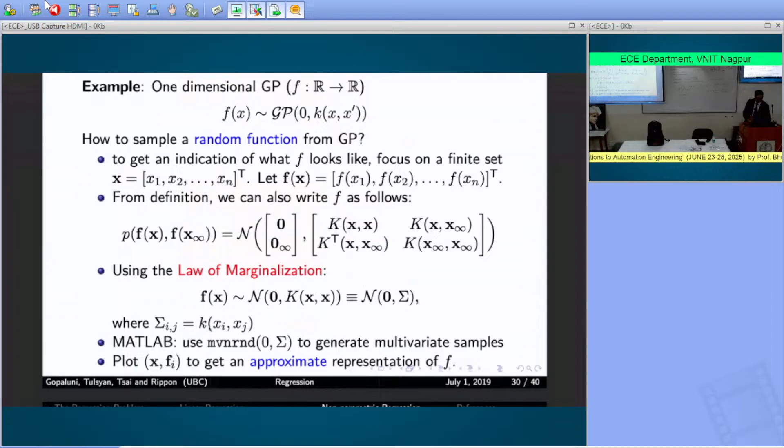Let's see. K is called the kernel function. It's basically the covariance between x and every other data point in your data. Some of these are probably not obvious or not clearly presented there.

Gaussian processes. So when you have a regression problem, you want to map finite training samples to a function that predicts all possible inputs. That's your data, that's the model. Given x star, you want to estimate y star. I already showed you how to learn linear and nonlinear regression problems. You can also do the same with Gaussian process regression, where the goal is to find the mean function and the covariance function from the data.

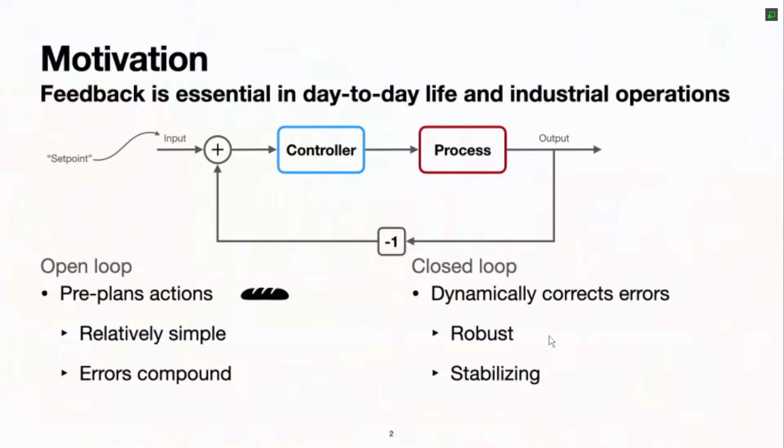So that's where feedback comes into play. If you add feedback and a controller, you can online dynamically correct errors. Therefore, this approach is going to be robust and stabilizing. Okay, so this is a little bit of background on control.

The problem is feedback loops often underperform. If you just have one control loop, it's manageable. You can build a model, synthesize a controller, validate it, and then install it on a real industrial process. But what if you have hundreds of control loops? How do you scale your algorithm? How do you go from process data to controller?

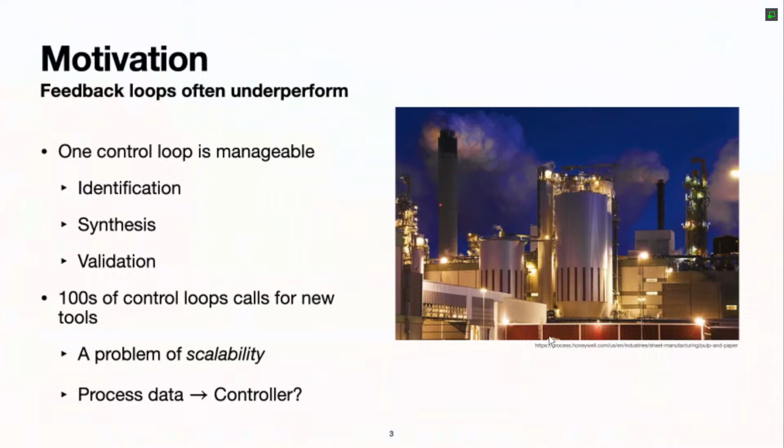And that's not clear. Okay, so we have used reinforcement learning in the context of replacing these traditional industrial controllers. So what I'm going to do is explain to you how we've used reinforcement learning in this context, and then also tell you about how reinforcement learning works, how the algorithms are built, etc.

So I think nearly 7 years ago, I went to Honeywell and I told them we can replace their controllers with reinforcement learning agents. What you see on the left-hand side is what typically happens in industries right now. So you have some environment, some process at the top, and then there is a controller. It's a PID or a model predictive controller or some other controller. And then you have operators and engineers who are constantly monitoring these controllers so that their performance is maintained on a continuous basis.

So I went to Honeywell and I told them, okay, look, we have these nice, cool algorithms, deep neural networks and reinforcement learning. We're going to replace all your controllers with reinforcement learning and deep neural networks. And they said, we've already invested millions of dollars in our existing infrastructure. There's software, so we don't want to change our existing infrastructure. Then we came up with this alternate idea of just replacing the human in the loop with a reinforcement learning agent, which oversees the performance of existing controllers.

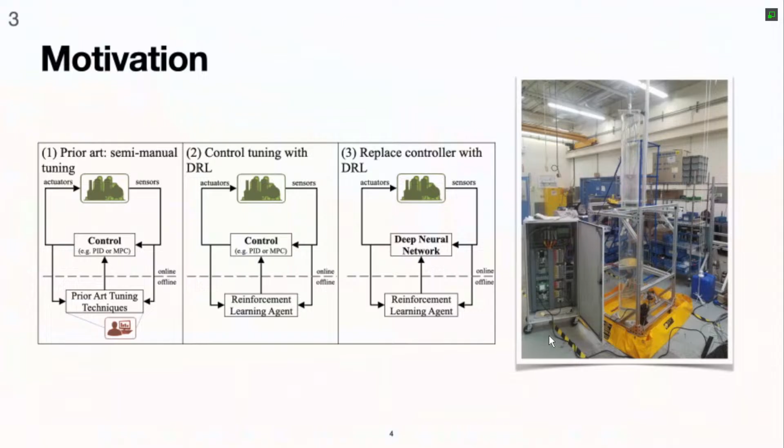What you see on the right-hand side is a pilot scale facility that Honeywell built for us to test some of these algorithms. Okay, so the question we asked was, can reinforcement learning help maintain these control loops? The answer, it turns out, is not very straightforward. With reinforcement learning, you can leverage observed data to improve the operations. You don't need any prior knowledge. It'll still work. You can minimize prior domain knowledge. And you can also build this automated agent that will maintain your controllers without any or much human intervention.

But the challenges are there is additional algorithmic complexity. Industries already have auto-tuners. And stability during and after training is very important. In addition to that, sample efficiency of these algorithms is very important. So our goal was to balance the automation and scalability of reinforcement learning using control theoretic tools to create efficient and safe improvements. Okay. So that's the context in which I'm going to explain reinforcement learning. We're using reinforcement learning as a tool that could potentially eventually replace traditional control systems.

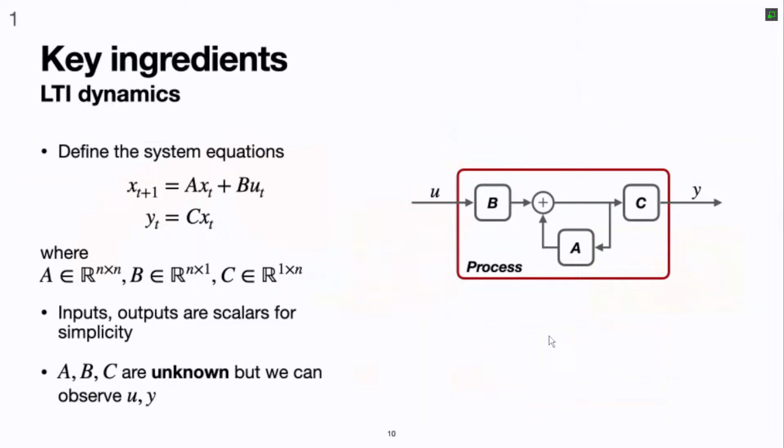You've probably heard of impulse response, right? So if you have a state space model, then the impulse response from X is given by X0. You start at X0, X0 equals 0, Y0 equals 0, and then you have X1, X2. You can use those recursive equations to find the value of X, the impulse response, at different time instants. Right.

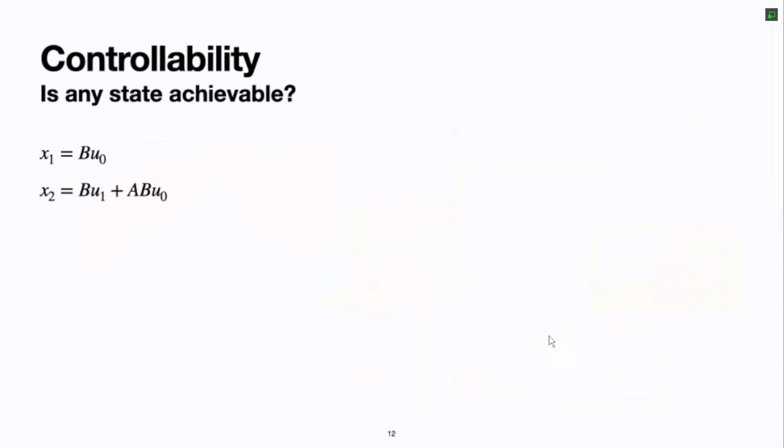The idea behind controllability is if I give you two states, X1 and X2, can you always find an input, a sequence of inputs U, that take you from X1 to X2? Okay? If you can, then your system is controllable. It turns out that this matrix here, C, that is made of the system matrices A and B, if that matrix has full rank N, then your system is controllable.

If that matrix does not have full rank, then you cannot take your system from one arbitrary state to another arbitrary state with a unique sequence of inputs. That's not possible. So controllability is a very important concept. Unless you have controllability with your system, you cannot get the behavior you're hoping for.

And a dual concept to controllability is observability. If I give you the inputs U and the outputs Y, can you find the entire state sequence, X? X's are states, they're hidden, they're not measured. So the question is, if I give you Y and U, can you recover a unique X, the underlying states? If you can, then you have a system that is observable.

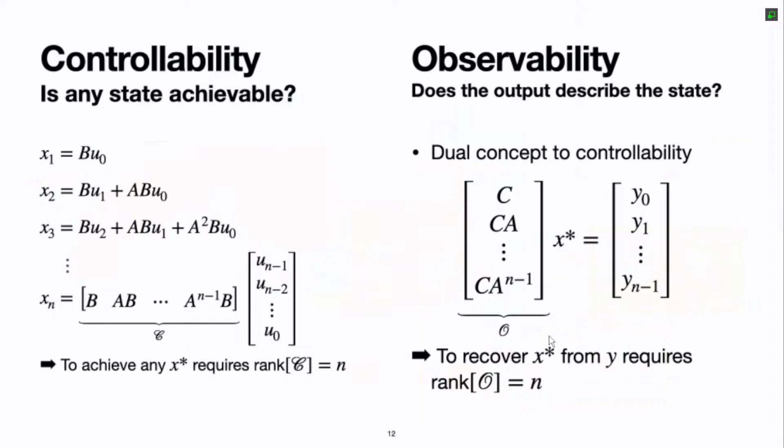And this matrix here, again formed using the model matrices C and A, is called the observability matrix. And one way to check if your system is observable or not is to look at the rank of this matrix. And if the rank of this matrix is full, if it's N, then you have an observable system. Okay, so these are two important concepts in control theory: controllability and observability.

So I'm going to get to reinforcement learning. But in order to do reinforcement learning, I want to build a model from data, okay? And I don't want to use parametric models. I just want a data-based model that's not parametric. And to do that, I'm going to use something called Willems' fundamental lemma.

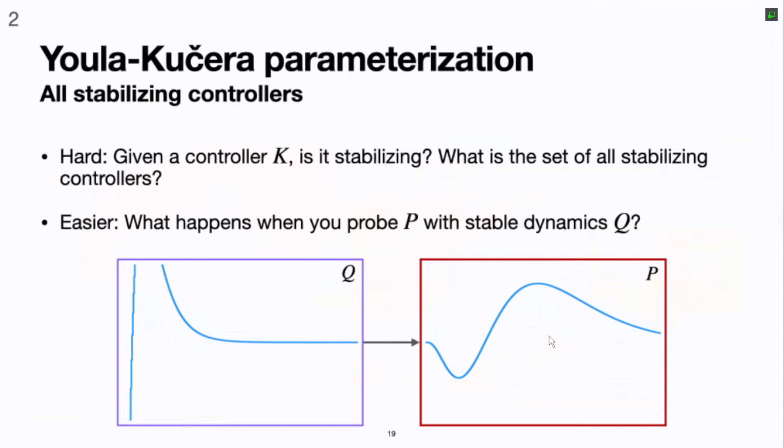The P here represents your system or process. Let's say that's the output of your system. And Q is some other stable dynamic system. So as long as the output of this stable dynamic system is bounded, the output of your process is also going to be bounded. In other words, if I put this Q in front of P, together they're both going to be stable as long as your P is stable and this Q is stable. And this idea is used in parameterizing all stable controllers using Youla-Kučera parameterization.

Okay, so if you have a P that's stable, Q that's also stable, then what you can do is the following. Oops. Sorry, there's too much animation here. All right.

So if this is stable, any Q in front of it will also be stable. So you can use that idea to characterize all stable controllers. Okay, so these two are equivalent. Here, if you look at this, you're taking this output and you're subtracting it from the controller, and inside the controller, you're adding the output of P, right? So you add and subtract, it's the same thing. So this is a different way of showing the same thing.

And now you have this controller, and this whole thing is going to be stable as long as you pick a Q that is stable. In that way, we have characterized all controllers that are going to be stable as long as your Q is stable.

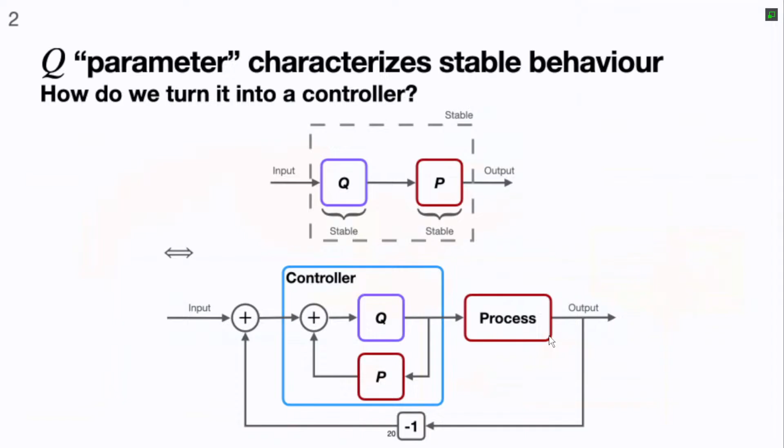Okay, so far I've told you there's this Willems' lemma that gives you a model. Then I've also explained how you can characterize all stabilizing controllers. The last ingredient to what we're trying to do here is reinforcement learning. Okay, so I'm going to spend a little bit of time here to explain how reinforcement learning works. You have the environment or the process. The process generates some states, s t plus 1.

In reinforcement learning, we use S. In control, we use X. They are the same states. So in control literature, typically you'll see people using X to denote state. In reinforcement learning, you'll see them using S to denote state. So the environment generates a state, and we also use the measurements from the environment to define a reward. A reward is your R.

And the state and the reward value are given to the agent. We'll talk about what's in the agent in just a moment. The agent then determines what action it's going to take on the environment. And the way the agent is going to decide the action is through something called policy. So pi is the policy. Policy in the control language is the control algorithm. It's similar to a control algorithm.

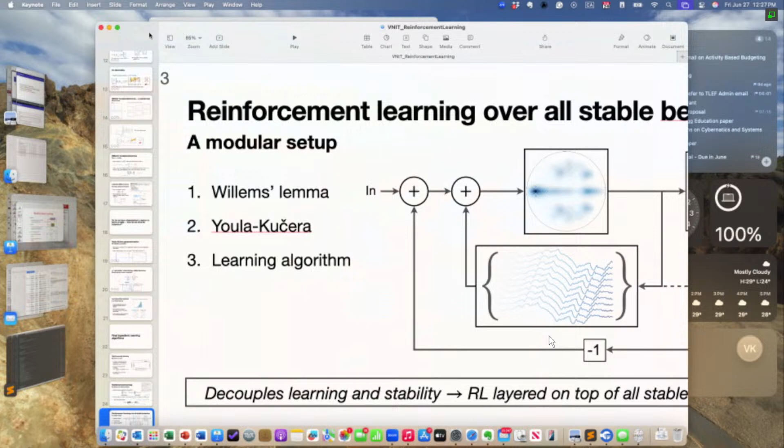Okay, so that is reinforcement learning. Willems' lemma gives you the model here, the stable model, and then the Youla-Kučera parameterization Q makes sure that the closed loop is stable, and then we use the learning algorithm to control the overall process.

So this approach is something that we came up with. Some of these ideas are patented. We try to decouple learning and stability. RL is layered on top of all the stable behavior. Reinforcement learning is really tuning this Q, the controller, or Youla-Kučera parameter.

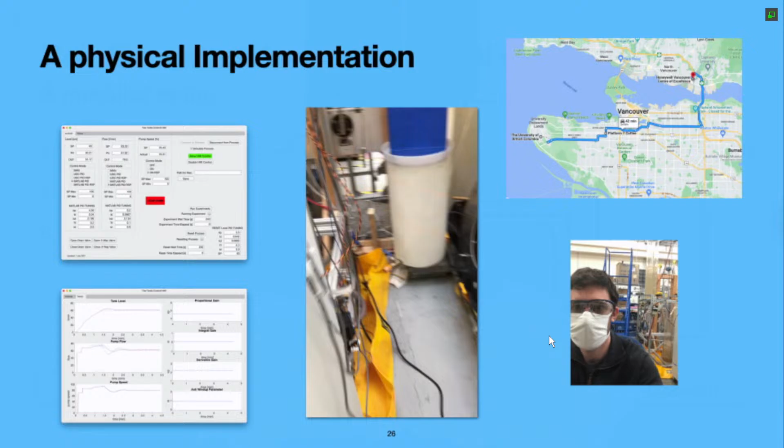Okay, there are some examples here. I think I briefly showed this earlier, but I'll explain what this is. That was my student, Nathan Lawrence. He's now a postdoc at Berkeley. Vancouver, University of British Columbia, is on that corner. He used to drive to Honeywell in North Vancouver.

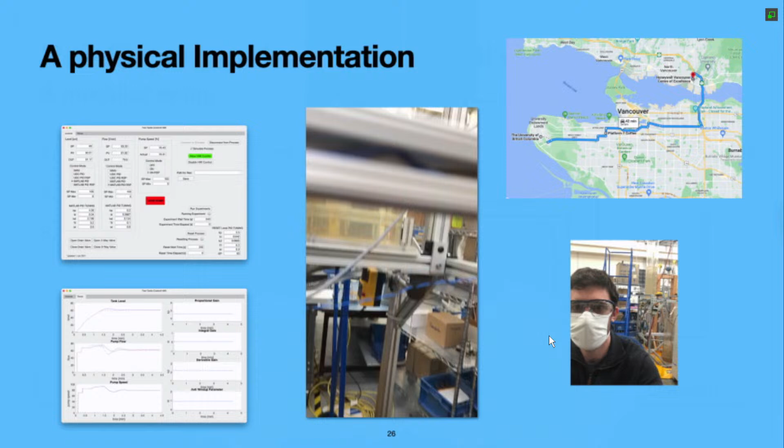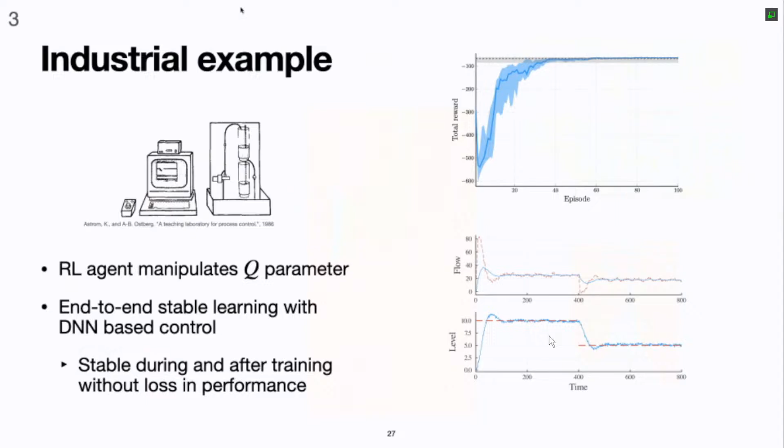This is a pilot scale plant that they designed and built for us. He was controlling this plant using the algorithms that I mentioned, not exactly the same algorithms, but different variants of those algorithms. Honeywell also developed an interface for us to interact with this tank. I believe this data is from that experiment. You can see the set point changes and the tracking performance of the RL agent.

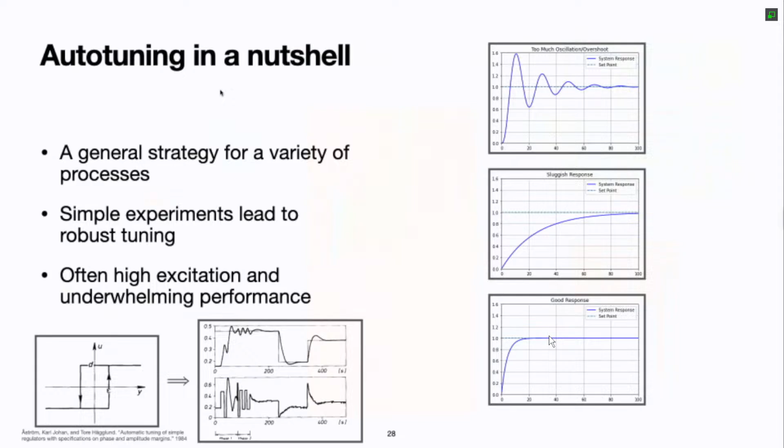It turns out that in the experiment that Nathan did, Honeywell auto tuners took about 5 minutes to tune a controller. His algorithm took 50 minutes. So that did not make sense. We wanted to figure out a way to speed up these reinforcement learning algorithms. He compared the reinforcement learning algorithm that he developed with a wide range of other algorithms that are in the market.

SIMC is an algorithm by Sigurd Skogestad at NTNU. So we compared the deep reinforcement learning with different performance metrics against AccuTune3, a Honeywell controller, and SIMC, Skogestad's IMC controller. Our algorithm worked better with certain metrics, but the challenge was it just took too much time, right? So if it takes 50 minutes when a Honeywell auto tuner can do that in 5 minutes, it's not very helpful.

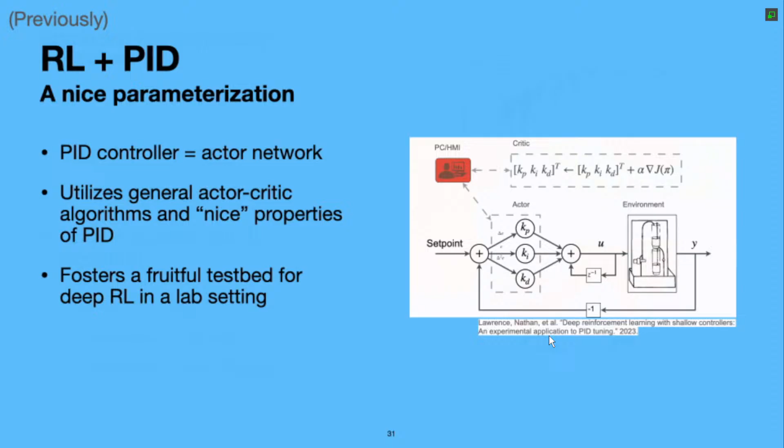Okay, RL plus PID. We have also used reinforcement learning to tune PID controllers. So I'll skip that, and I'll just explain a couple of other things using what is called meta reinforcement learning. Surendra and I have to leave at 12:45, but I'll give you the advanced learning Python notebook. You can spend 15, 20 minutes on that. It doesn't have, unfortunately, code for reinforcement learning.

You can get it online. There are lots of controllers. As I mentioned yesterday, OpenAI Gym. So if you have time today, what I suggest is, I don't have this code, but I'm sure you're smart enough to ask Gemini to build it. If you go to OpenAI Gym, there is a lunar lander. It's a vehicle that's supposed to land on the moon. That's the simulator. That's the environment.

In OpenAI Gym, you'll find a lot of environments. I talked about environments, right? In OpenAI Gym, you'll find a lot of open source environments. The lunar lander is one of those environments. Take the lunar lander and use reinforcement learning to land it. On the moon, they have 2 flags. Your goal is to land the lunar lander between those 2 flags. You'll find code online for reinforcement learning. You can probably use that and figure out how to land it between the 2 flags.

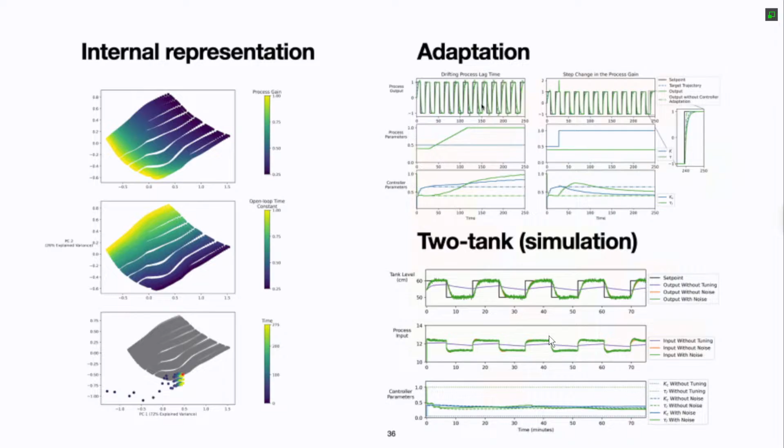So I'll show you some examples here. In the top right-hand corner, you see, maybe I should zoom in. Let's see if I can zoom in. Right. The solid black line is the set point. The dotted line, the green line, is the output.

So now because this RL agent was trained offline on a wide range of systems, if your system changes, let's say your time constant changes or the gain changes, something happens to your system and it's behaving differently, because your RL algorithm was trained on multiple offline models, it can very quickly adapt. Okay, so that's the adaptation part. I think somewhere over here we changed the system. The RL agent very quickly learned and started controlling the new system.

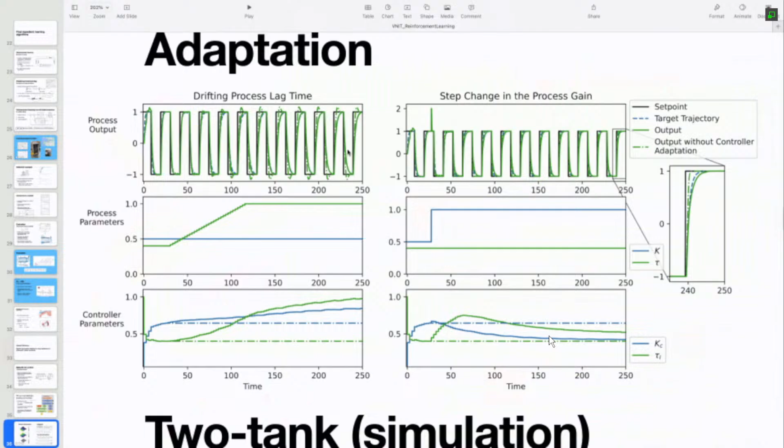And this is another interesting example where the solid line shows the set point. The purple line is what a typical PID or other controllers that are not tuned would do when you change the system. And the green line shows the response of our meta reinforcement learning algorithm. Right? Even if you change the underlying system, it automatically learns what you have and starts adjusting its policies appropriately.

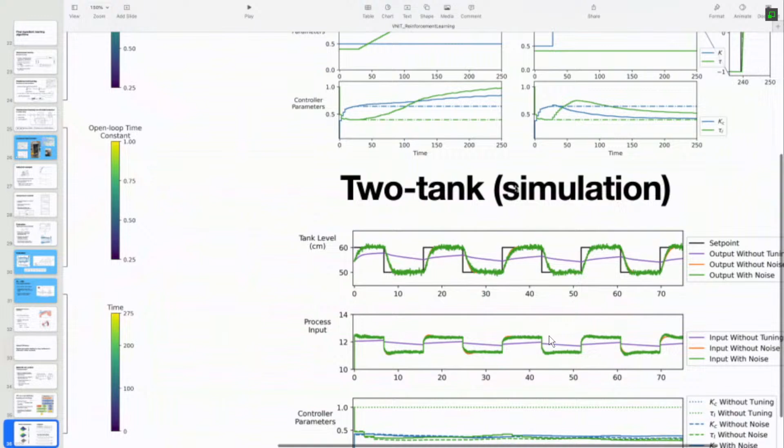Okay, I think I showed you some of these examples in my very first lecture. I apologize, I know I went through a little fast. There's a lot of material there, but my hope is that you'll go away with some intuition into how these algorithms work. If you really want to understand the nitty-gritty mathematical details, you will have to spend many hours reading reinforcement learning. Hopefully you understand what reinforcement learning is and how it works broadly at a high level, and I've shown you some applications. Hopefully you've also seen the parallels between control, which you may have studied in your undergrad, and reinforcement learning.

Reinforcement learning is used in large language models as well. They use a variant of it called reinforcement learning from human feedback. It's widely used in robotics and a variety of other areas. It's a very popular tool for solving optimization and control problems under uncertainty. One of the main people behind reinforcement learning is Rich Sutton. He's at the University of Alberta. He received the Turing Prize 3 or 4 weeks ago. The Turing Prize is considered the Nobel Prize in computer science, for his work on reinforcement learning.